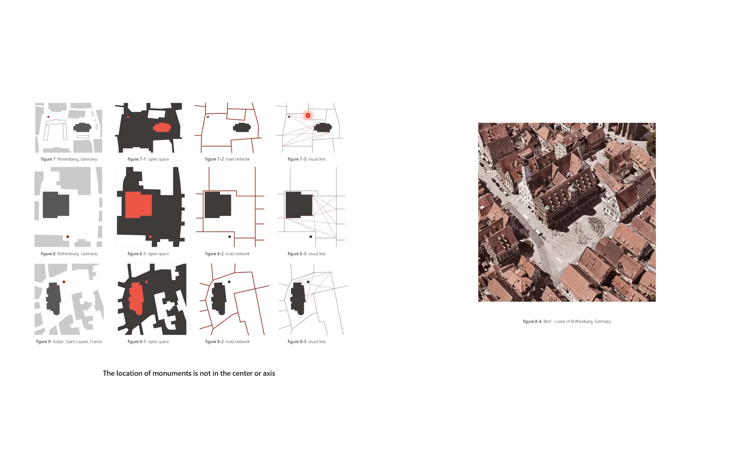This can avoid obstacles to traffic, allow appreciation of the main building, and leave more space for daily activity. Secondly, designing buildings close to other buildings instead of in an isolated location.

This feature strengthens the connection with the surrounding buildings to create picturesque and interesting scenery, and leaves more space for transportation and distance for appreciating the main facade.

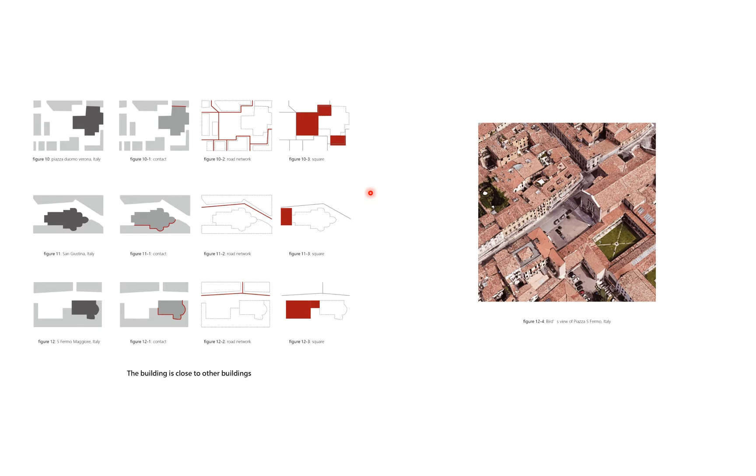Thirdly, the square on the side. The way to create squares on the side of the building makes it better used and appreciated, and highlights the specific side facade with a strong relationship with the surrounding buildings. What's more, it can provide complete space for daily public activity.

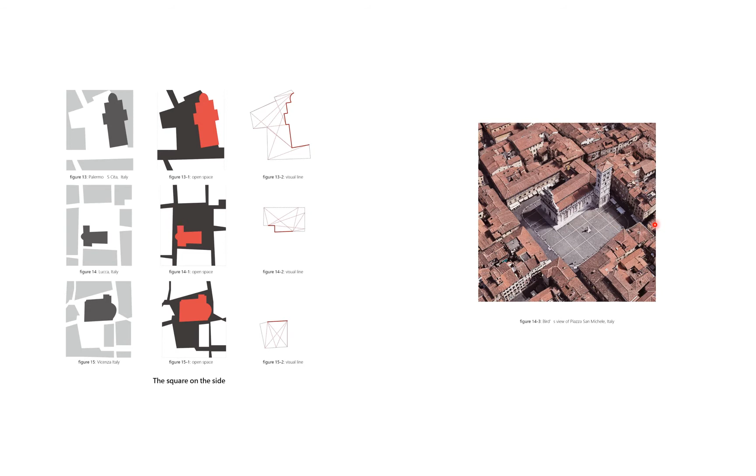The next one is the closed feature of the public square. In ancient times, people gave the squares a closed feature and considered it the most basic condition for a public square.

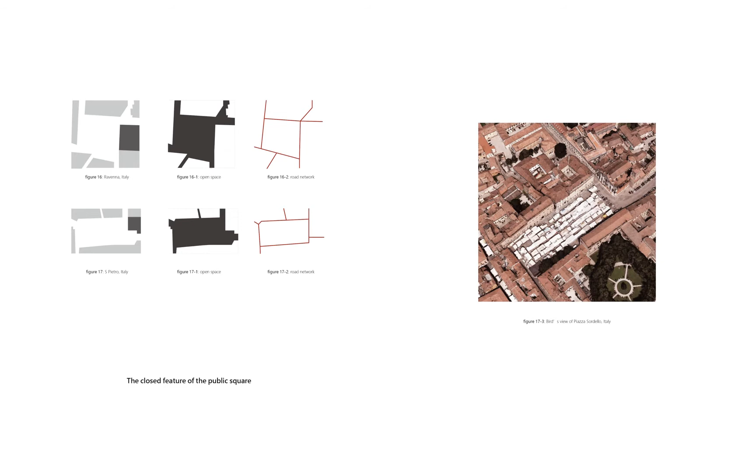Designers tried to make every corner of the square have only one road into the square, called the turbine blade road system, so that it can control the direct view in and the limited view out.

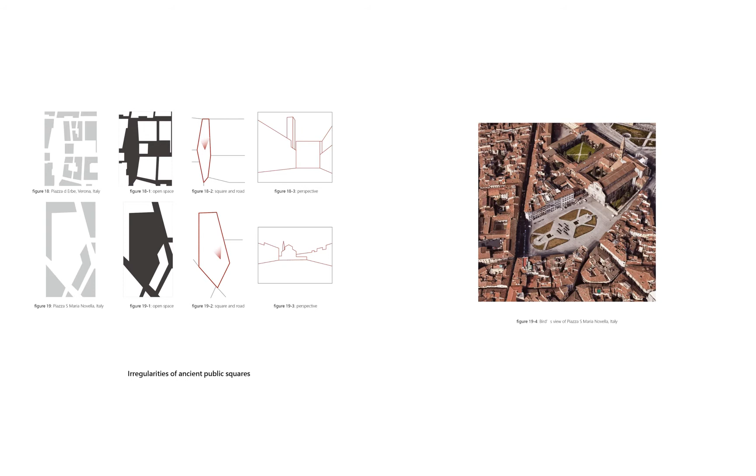Fifthly, irregularity of these public squares. This slight asymmetry is cleverly hidden by people's blind spots and visual errors, which ingeniously highlights the main facade of the main building. The feature also worth mentioning is the scale of the public square.

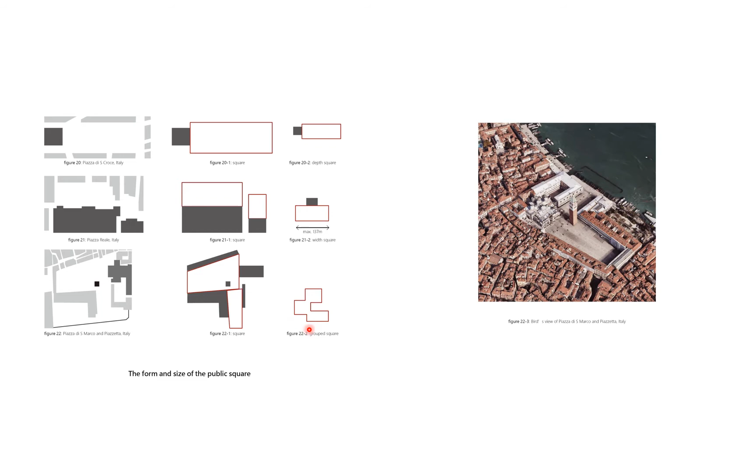The deep square is related to the high and narrow building. The wide square is related to the wide and low building. The grouped square is organized by the scale of the surrounding buildings. This is clearly shown in the Piazza di San Marco.

After research, Sitte illustrated his ideas by making refurbishment designs for the Ringstrasse in Vienna. He considered the disposition of the Votivkirche to be a good example of bad urban design, and used this design to show how medieval features work in a modern system.

As the two maps show, on the left is the original plan and on the right the proposal. From the original plan, the main building seems smaller than it actually is, due to the oversized square with unclear distinction between square and road, and the square lacks an enclosed feature. Even the buildings behind distract focus from the main facade.

The first step is to redefine the new square, creating a depth square for high and narrow volume of the main building by adding two sub-buildings, which enhance the enclosed feature and block the facade behind it, so that more focus is on the main facade.

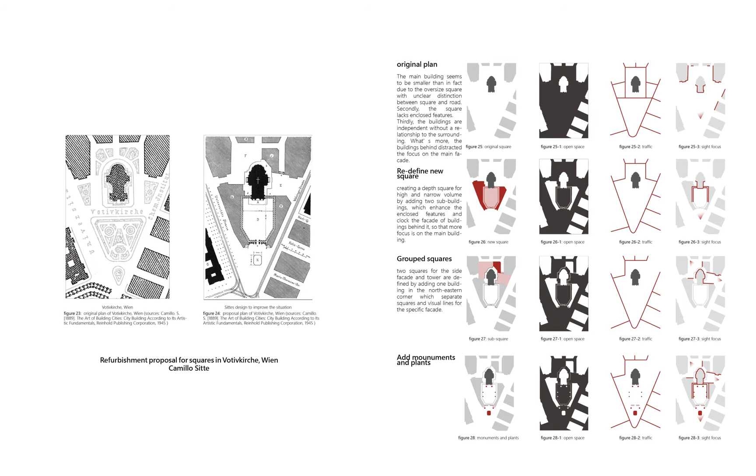Then is to create grouped squares. Two squares for the side facades are defined by adding one building in the northeastern corner, which creates two sub-squares and visual lines for the specific facade. Lastly is to place monuments and plants.

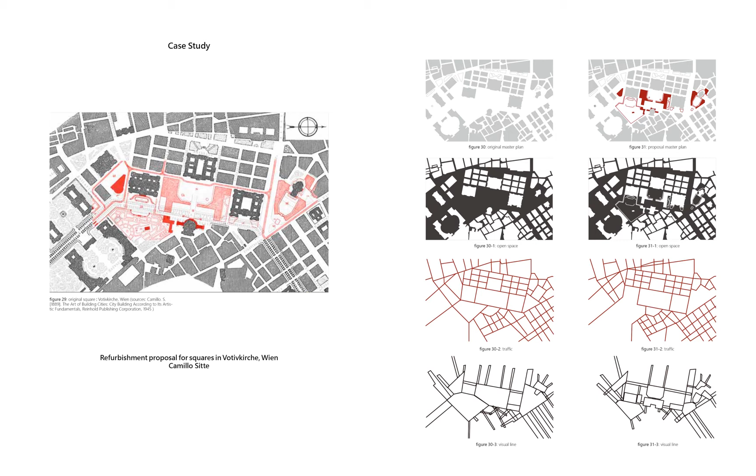With the same technique, Sitte redefines the areas around the church Votivkirche by increasing the density of buildings in this area to reduce the oversized public open space, reorganize the road traffic, and control the sight connection between squares.

The last case is from Robert Tullis, refurbishment of Boston Creek Square. He resquared the Boston Creek by learning from Piazza del Campo's proportion, traffic organization, and sight control from inside and outside the square. The diagram shows the design process, starting from building demolition to create new open space for more opportunities.

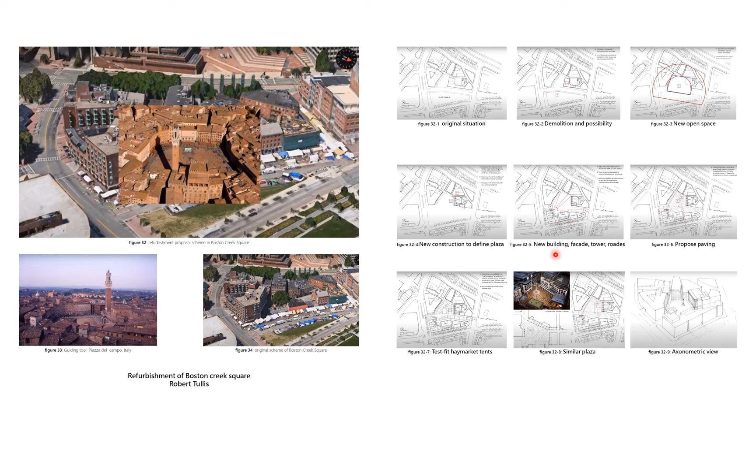Then add new constructions to improve the enclosed feature, control the view from the outside. After that, he adjusts the height of the building to match the scale of the square and improve the attractions to visitors, finally placing the monument and pavement by road direction.

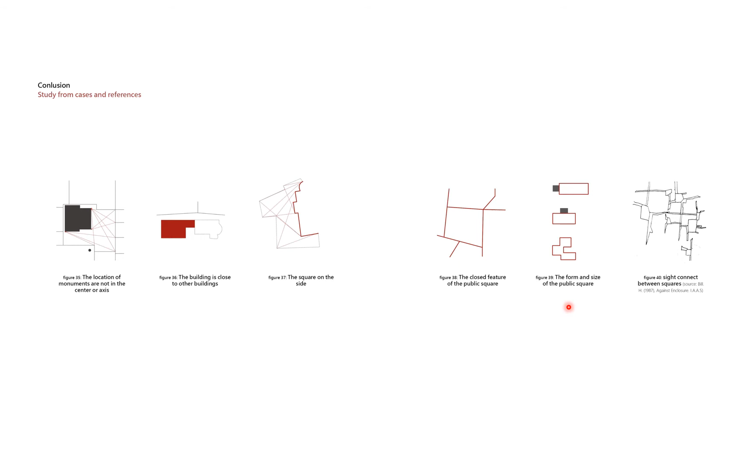In conclusion, there are 6 features from the case study. The location of the monuments are not in the center or axis. The building is close to other buildings. The squares on the side, the close feature, squares in different scales for surrounding buildings, and the view connection between squares.

River system runs through the city of Chicago, including its city center and rural areas. What's more, Chicago is a complex city with 7 urban typologies. 3 of them are high-density typology with limited open space for public. In the city center is the high-density high-rise typology with huge rise gap between buildings.

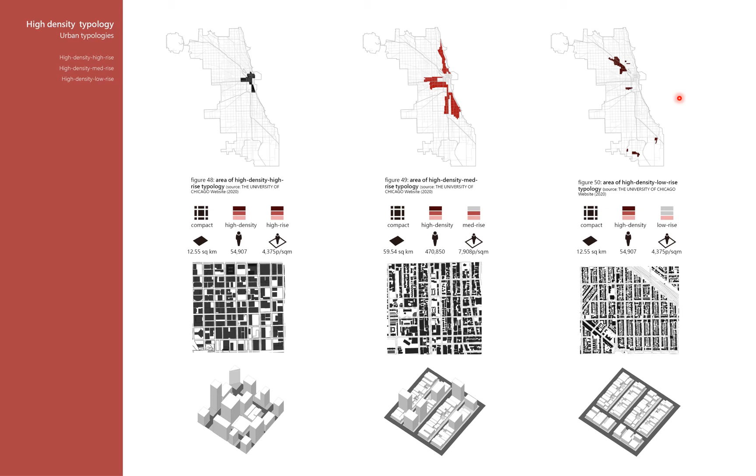The areas between center and rural is the high-density medium-rise typology. Most of the buildings are under 15 floors. The high-density low-rise typology mainly spreads in rural areas, normally 3 to 5 floors with flat skyline. The most common typology is median density, spreading outside the loop area with median and low building height separately.

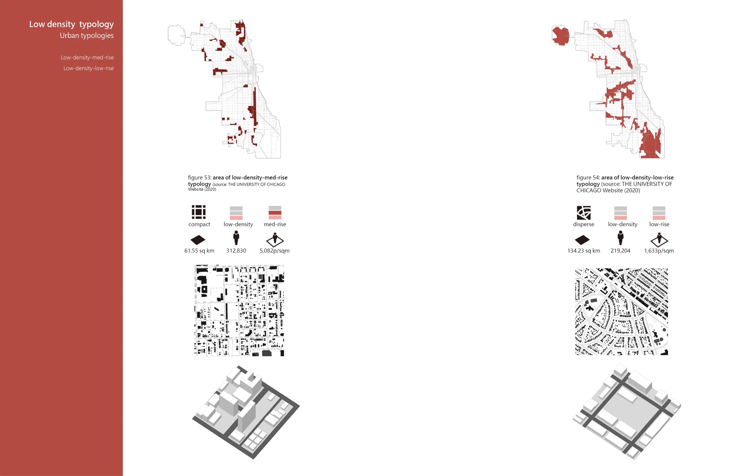Different from high density, there is open space with appropriate scale but without good quality. Then the rest 2 are low density typology with median and low building rise. There is large empty space to build up in the future.

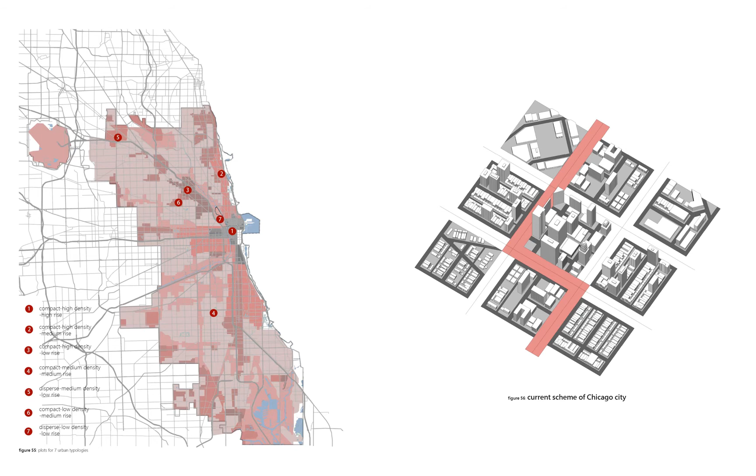To combine these 7 typologies to illustrate the current urban scheme of Chicago, the building density and the rise decrease gradually from city center to rural area. As the diagram shows, the blocks are arranged by grid system. The pink tab is the river system, which crosses the city center to rural area.

Chapter 3 is the urban strategy as design tool. The issues of public space in Chicago cannot be ignored. Overdevelopment in loop areas decreased open space to be limited, fragmented open space, and weakened connections between space and urban due to the less focus on public space design.

The objectives are developing the surrounding areas to release the pressures in city center, reshaping the squares with good quality, and creating connections between buildings, human scale, and the squares.

The strategy is to create a new squares network based on the existing Chicago plan with urban typologies, regular grid system, river system, so that view connections can be established between squares instead of being isolated, and the river landscape can be joined. In order to create squares locally, there are 7 strategies for 7 urban typologies.

In high-density, high-rise area, limited open space can be used, so reusing the existing roof space is the strategy, as the pink color shows in the diagram. Then accessibility with stairs, ramp way, lifts, and bridges is the red color shown in the diagram.

The next one is the high-density medium rise. The big roof space here is less than the high-rise typology. So combination of the roof space and added new roof is the solution. The new added roof is above the road so that it cannot affect the traffic.

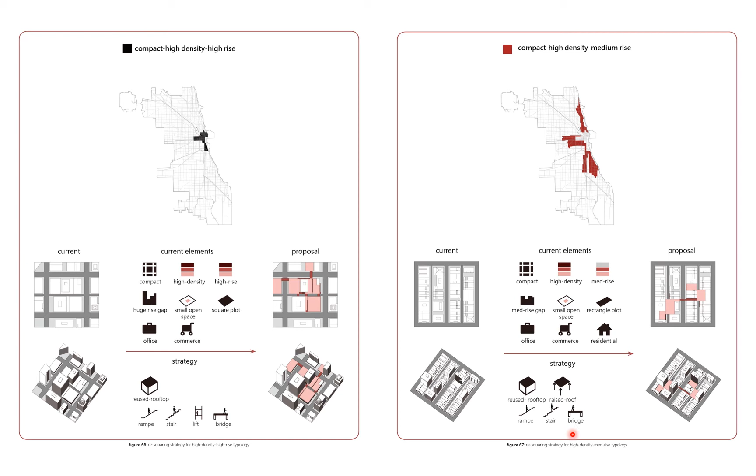Then is the high-density low-rise area. Limited open space and roof space can be used. In this case, adding new roof space between buildings is the strategy. Secondly, is the strategies for medium density, totally different from high-density typology. Existing open space here has appropriate scale, but it lacks good quality.

In the medium-rise area, the strategy is reusing the roof space, redefining existing ground squares, and adding constructions to improve the quality. In the low-rise area, the strategy is to build up new buildings to redefine the existing open space. Thirdly, in the low-density area, densifying is the main strategy due to the oversized open space, adding new constructions in the medium-rise area to create totally new squares with rise scales and view contact to the other squares.

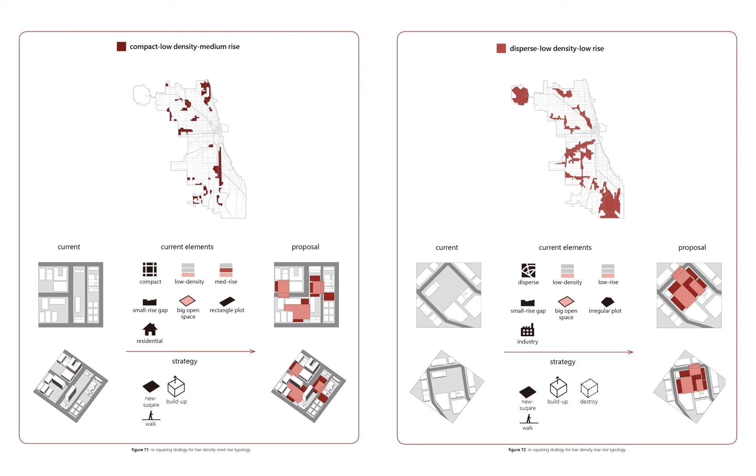The low-rise typology is mainly spread in the industrial areas, so it should consider building demolition and adding new constructions to create new squares. After that, the new scheme of Chicago City is shaping under these strategies.

As the diagram shows, the vertical squares spread over the city with different heights, from more than 15 meters down to ground level, and there is view contact between squares based on the grid system, which enhances the continuity of urban space. At the same time, the river landscape is introduced into the squares.

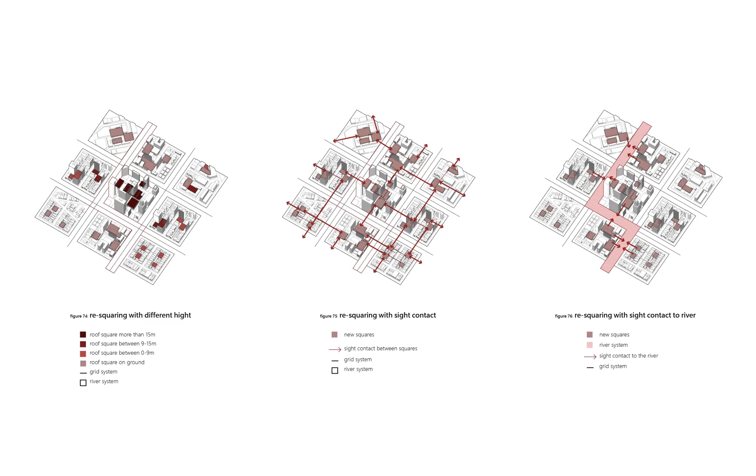The last chapter is a test location in Goose Island and the surrounding areas. Goose Island is a perfect location surrounded by rivers because it junctions with the city center and rural areas, and is also the junction of 5 urban typologies.

Using the design tool proposed in the previous chapter, we resquare the 5 typologies in Goose Island and its surrounding area to see how the strategy works on the specific site and what changes between the typologies.

Following the design strategy, we collected the basic maps of Goose Island and overlapped them to create squares of different typologies. With the grid system, the new square network has view contact to each other and joins the river landscape to the squares. As the diagram shows, red is the redefined square and the pink volumes are new constructions.

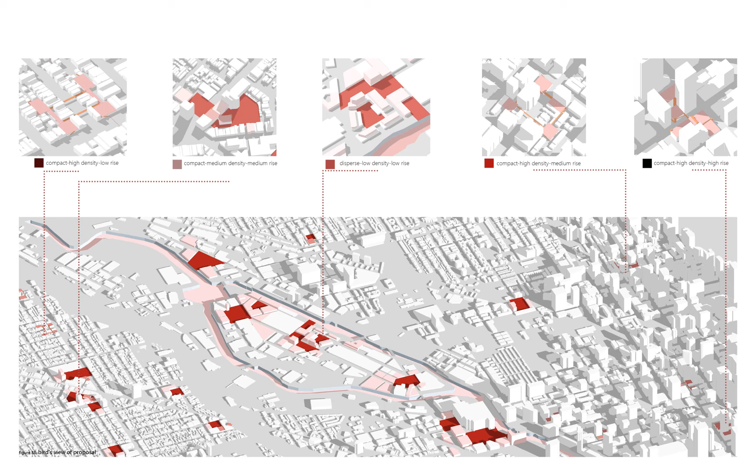There are 5 plots I picked for different typologies for detailed design in Goose Island and the surrounding areas, to see how the squares link to each other within the square network. The first location is in Goose Island.

It's a low-density, low-rise typology, which has large empty space. Most of them are parking lots. As the diagram shows, the open space is too big for the short and flat surrounding buildings, and the view from the street lacks a sense of leading.

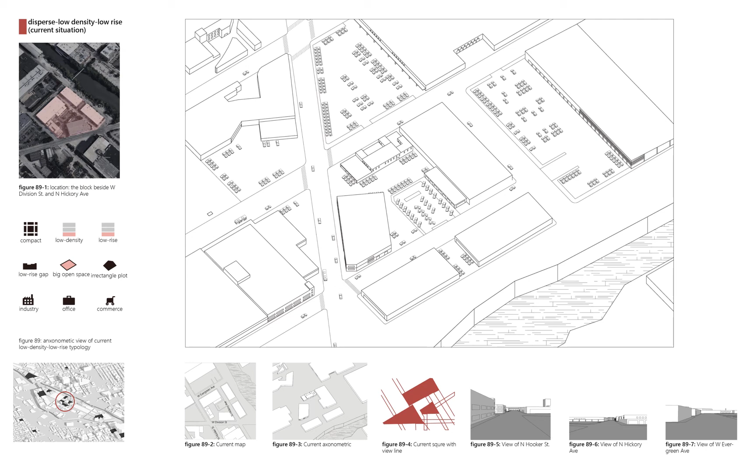So the strategy is to demolish abandoned industrial buildings and build up new constructions, as the red line shows in the big scheme, which defines the new squares.

As the diagram below illustrates, the open space is now smaller with stronger enclosed features, so that view contact between the squares is formed and the view from outside is controlled. Finally, monuments are placed as attractions in the squares according to the road direction. In this case, the view from the street has a stronger sense of leading than before.

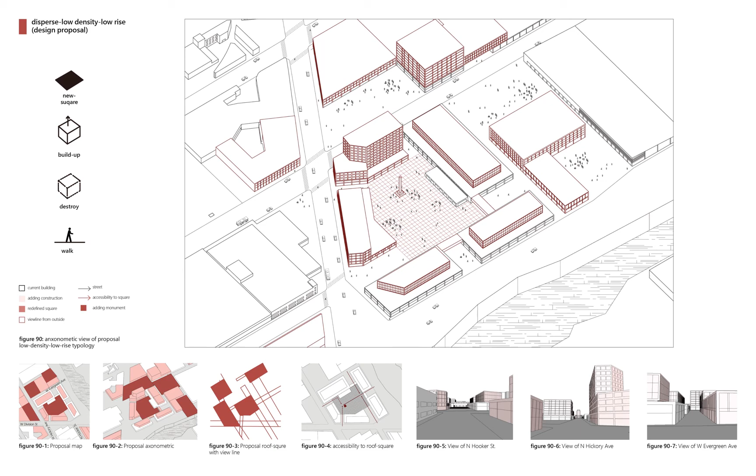The second location is in the west of Goose Island, which is medium-density, medium-rise typology. The size of the open space here is appropriate, but the enclosed feature and view control is weakened, as the diagram shows. The strategy in this typology is to build up constructions to enhance the enclosed features and control the view from inside and outside.

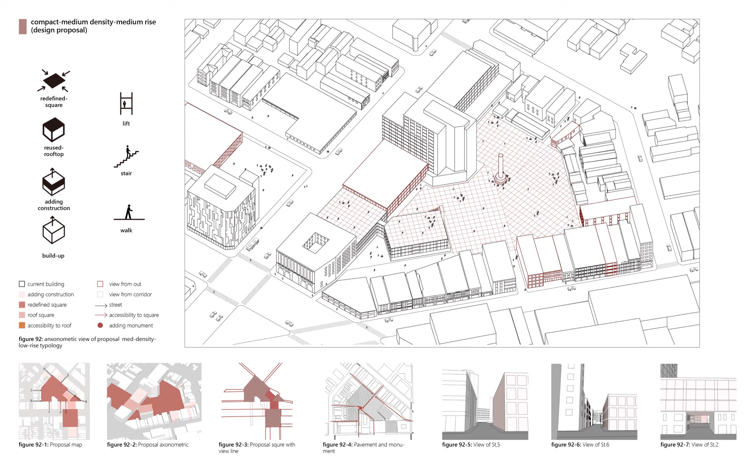We also add new stairs and lifts to reuse the roof space, then place monuments and pavement according to the road direction. So now the view from the outside is limited, and the roads leading to the squares have a strong sense of leading.

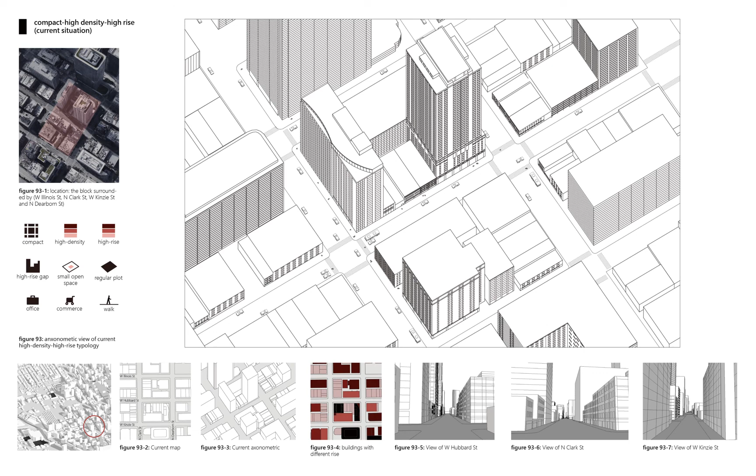The high-density, high-rise typology is located in the city center. It's difficult to use the limited open space for public purposes. However, there are huge existing roof spaces that can be used. With the large rise gap between the buildings, it's necessary to analyze the rise of the buildings in this area.

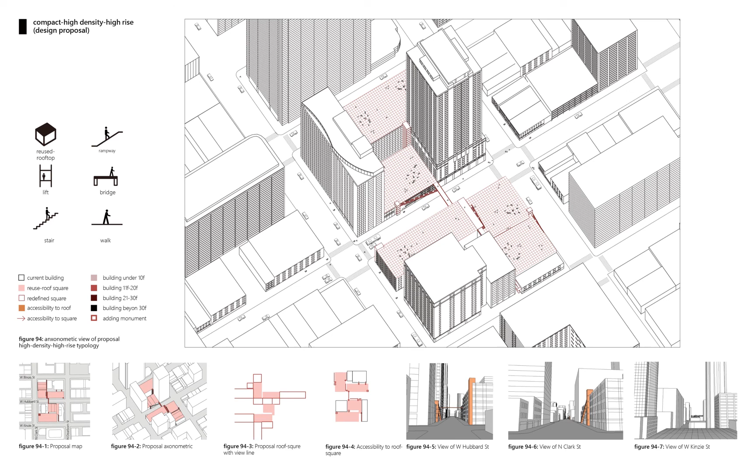The strategy is to reuse the existing roofs as squares, accessed by extra stairs, lifts, rampways, and bridges, choosing roofs where at least one side is not blocked by tall buildings and that have view contact to neighboring roofs. This creates view contact between the surrounding roofs and to the urban landscape.

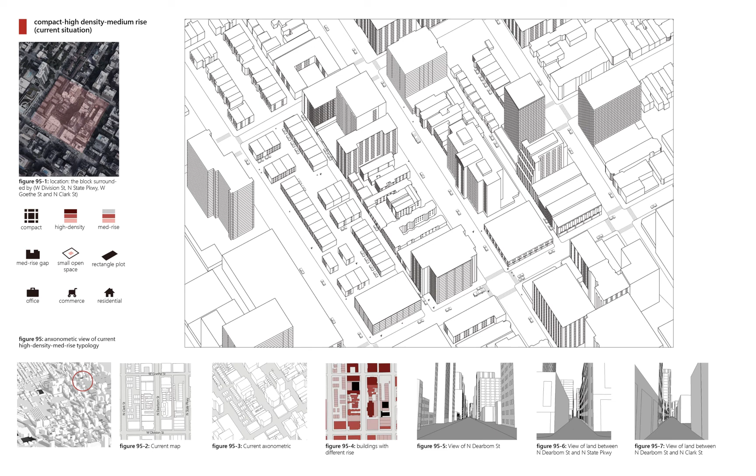We also use the design tool to create roof squares in the high-density medium-rise typology, and also in the high-density low-rise typology.

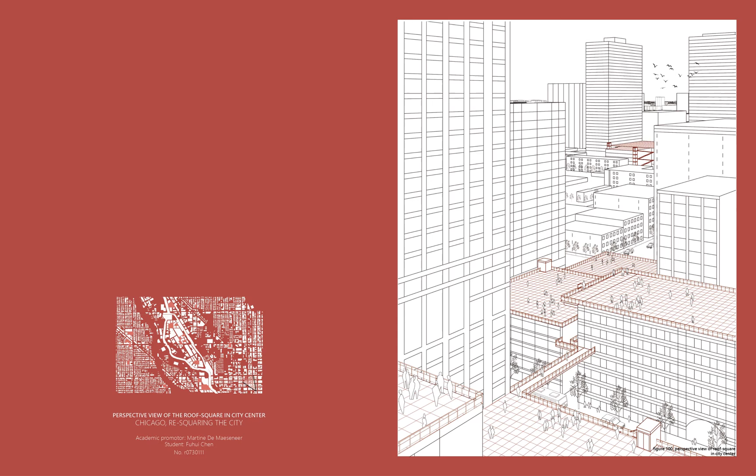At the end of this presentation, I would like to say that the design of architecture, public spaces, and urban design are not isolated from each other. They should be designed as an entirety and work together to create a unique urban atmosphere, memory, and culture.